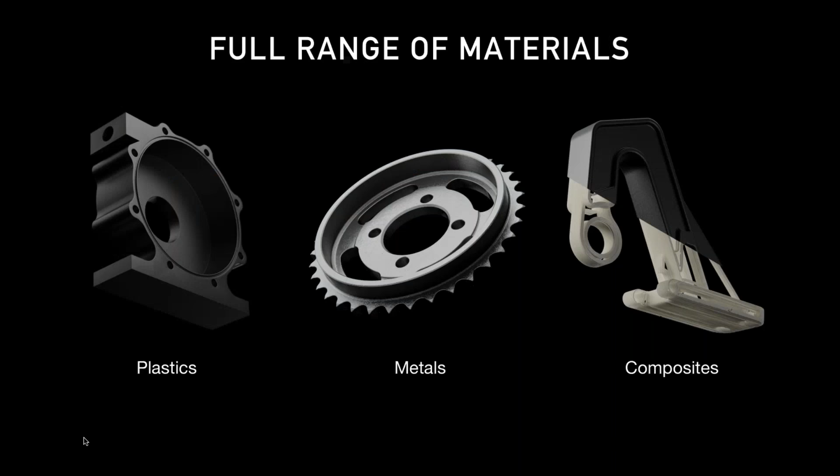That growth has been driven because we're the only company to offer the full range of materials, from plastics to metals to fiber reinforced composites. But today we're going to focus on metals.

Let's start with a customer case study. Dixon Valve and Coupling is a global manufacturer of hose fittings and accessories. They've been in business for over 100 years, and they offer the broadest range of coupling products in the market.

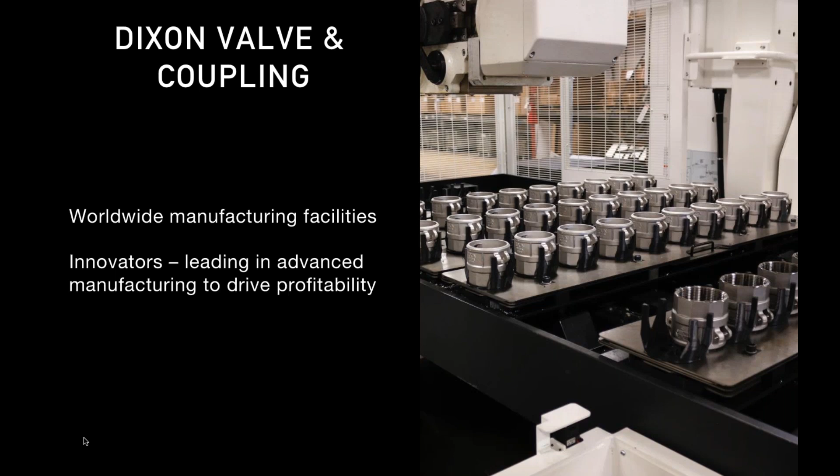You don't survive 100 years as a manufacturing company without being innovative. Dixon Valve has led the charge on moving to automated manufacturing in their industry, and that's been able to drive a great deal of profitability and flexibility for the product lines that they make.

Today we're going to look at one individual particular problem that they're facing, which is an automated manufacturing cell that makes a steam pipe coupling. You're looking here at pictures of the steam pipe coupling on a tray. These things are cast and then machined and galvanized.

And the last step of the final assembly process is to put in a polymer crush ring, and they press that into the part before they ship it to customers.

Unfortunately, when they machine these things, the insides of the couplings are incredibly sharp. You can see that the threads are present inside, and those are very sharp threads.

The way that they press in that crush ring, they use an automated cell. They have a robot arm with a gripper on it, which inserts into the inner diameter of the coupling, expands, picks it up, and moves it to the press fitting station. They press fit that polymer ring in, and then it puts it into the output flow, which you're looking at here.

That sharp thread on the inside is really abrasive to the gripper on the end of that robot arm, so they're wearing through these jaws very quickly. They need to make them out of a hard material. If they need to make them out of a hard material, now they're machining things like stainless steel, which is slow, difficult, and expensive. And if these jaws wear or break, now you've got line stoppages.

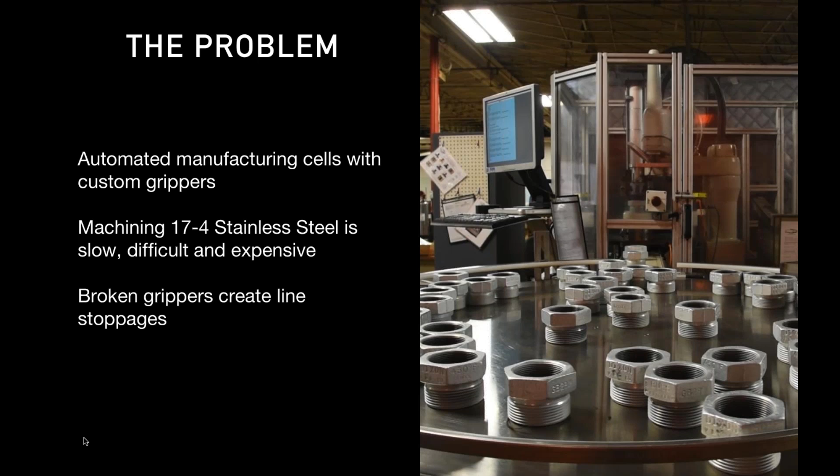Dixon has a lot of flexibility in the types of parts that they make, so often they're changing out this tool as well as changing the shape or type of the couplings that they're manufacturing in this automated cell. So that's the problem that they face.

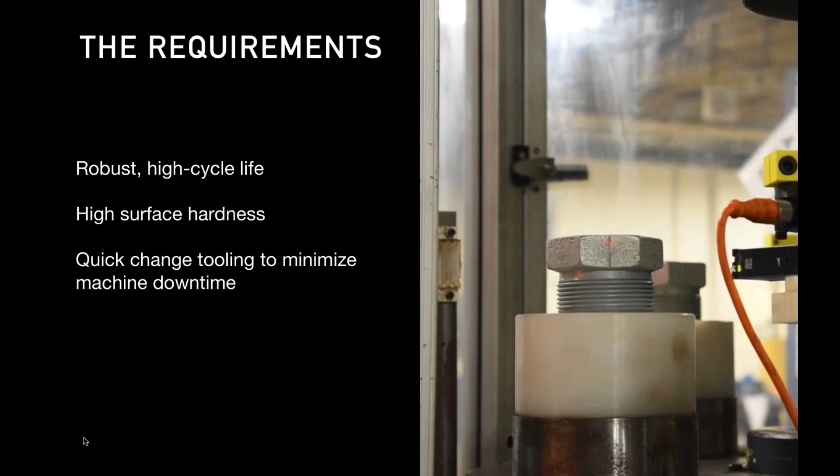Their solution requirements: they need a gripper jaw for the end of that robot arm that's robust, that has an incredibly high life cycle, high surface hardness, so that those sharp threads inside of the part don't eat it away. And then they need the ability to quickly change the nature of that tooling to minimize the downtime of this cell in their manufacturing line.

Okay, let's look at the solution. The solution is 3D printed 17-4 gripper jaws. With the 3D printing metal technology from Markforged, they're able to go from art to the part itself the next day. They save $303 per gripper jaw.

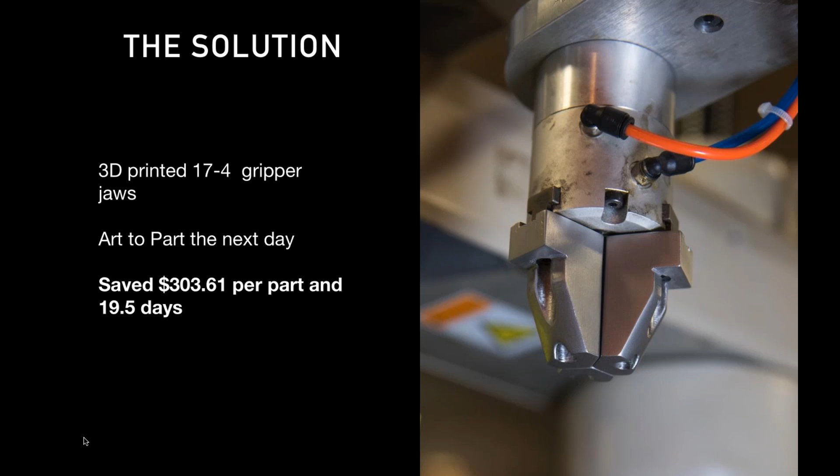That's because their machine shop is incredibly busy. They have one in-house, but they're primarily using it to machine high-value customer parts. So when they need tooling for the manufacturing line machined, they get in line and they have to wait. So now they're able to quickly and easily design gripper jaws for this manufacturing cell much faster and incredibly less expensive.

All right, so to understand how that all works, let's go through the process one step at a time and explain how it goes. We'll start with an overview.

You start with designing your part. You design the part that you want just the way you normally would in your CAD software. You print it on the Markforged Metal X printer. You bake it in an oven. There's a washing step between the printing and the sintering that we'll talk about, and then you're left with your final part. So it's really a series of steps that go from design to part, and you can do that by the next day.

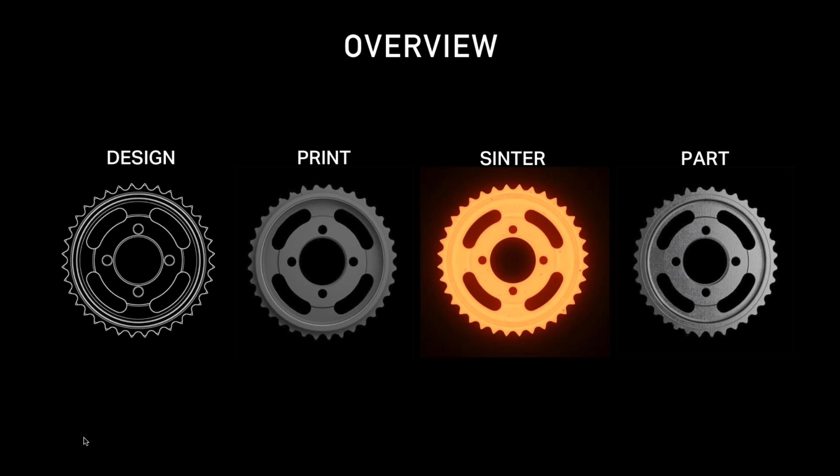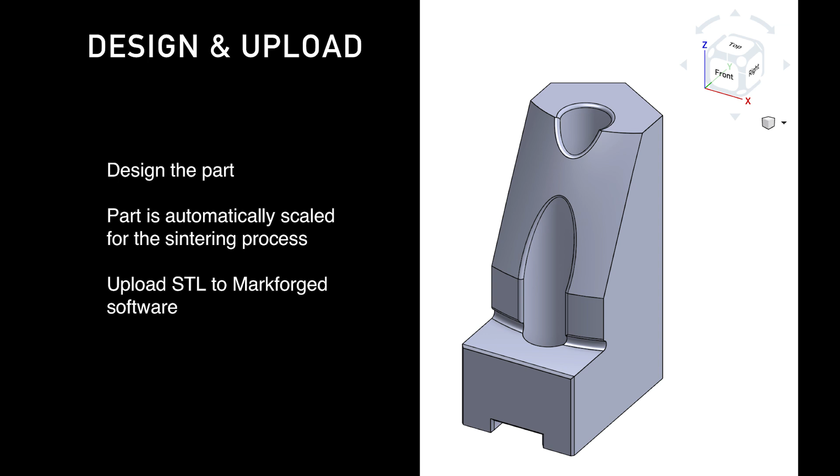So let's go step by step. Step 1 is designing your part and uploading it into the Markforged software. You use the CAD software that you're familiar with today to create the part that you want. You don't have to worry about scaling because we handle that for you to account for shrinkage during the sinter process in our software. And then you simply upload an STL of that part to the Markforged Eiger software.

And after you've designed and uploaded the part, it's really as simple as just hitting print. The part takes about 3 hours to print. I'm going to show you a series of progressive images of that part being created. We would have liked to show it as a video, but it doesn't come across on the webinar very well.

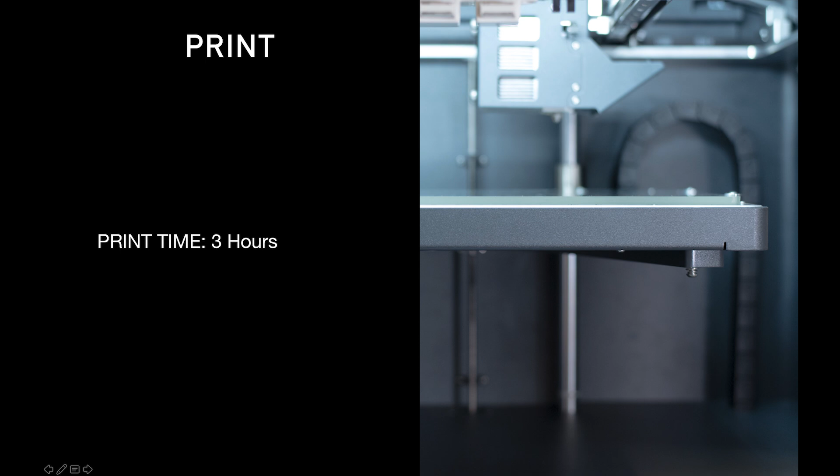Once you've hit print, the printer starts to print that part one layer at a time. What it's printing is metal powder, in this case 17-4 stainless steel, that's been bound in plastic. Unlike other traditional metal 3D printing technologies, that powder is now rendered safe because it's inside of a plastic binding system. We heat that plastic binder and print layer at a time.

So here we will go through and watch that part be built one layer at a time, just like an FDM style part creation process that you're probably very familiar with. And 3 hours later, you have your part.

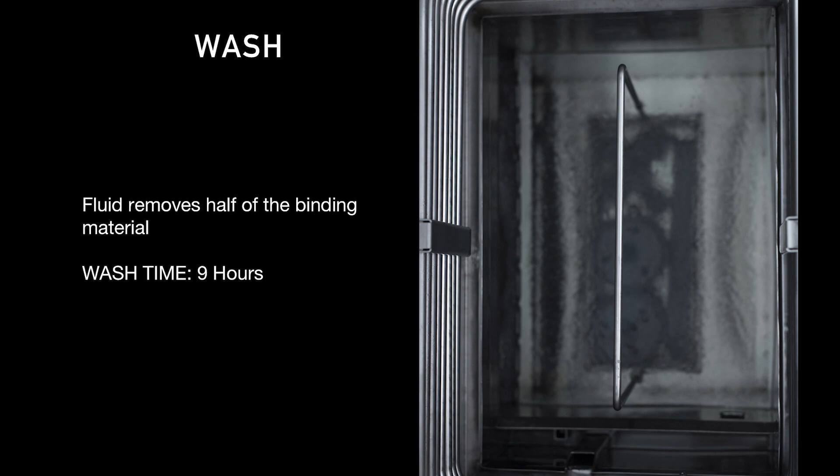The next step is to take that part and put it in the washing station. The washing fluid removes about half of the binding material. It takes about 9 hours to wash entirely through that part, cleaning out all of the half of the binder material so that you're left with a part that's sort of sponge-like, porous almost. At this point, the part is a little bit more fragile, but it's not like so sensitive that you could break it without trying. But it takes about 9 hours of wash time.

It's important to note that you cannot overwash the part, so if you leave it in there longer, that's fine. The only problem is underwashing, so you want to make sure that the part is at least in the washing fluid the recommended amount of time.

By the way, the washing station is connected to our software, as is the sintering station, which we'll talk about next. So we'll tell you exactly how long to wash it. We'll track that washing, and you'll get an email when it's done washing. So this is really almost as simple as running your dishwasher. You place the part in the basket, drop it into the station, close the lid, and come back and get the part back out when the timer expires.

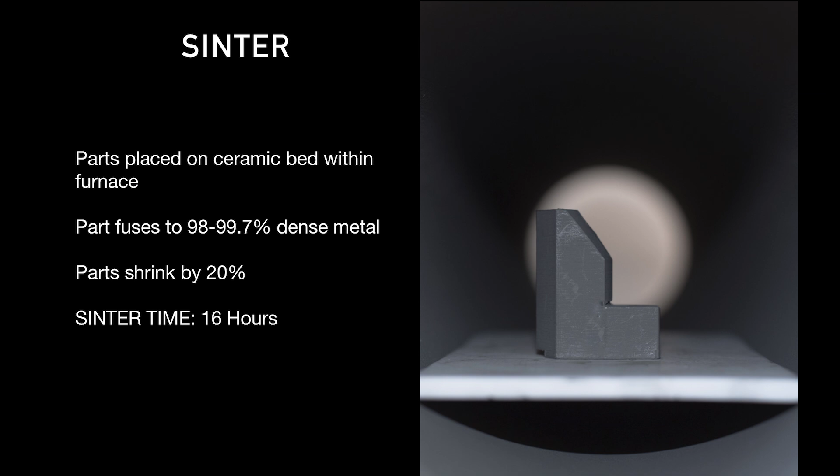Once the part has been washed and that first layer of binder has been removed, you move on to the sintering step. You place the part on a ceramic bed inside of the furnace. We have two options of tube furnace available.

You slide that into the hot zone, the uniform hot zone inside of the furnace, and you sinter the part for about 16 hours. During the sintering process, the part is run through a series of ramp and hold temperatures. The first hold temperature burns out the remaining binder material, leaving you with powder that is held loosely together. As you continue up the temperature ramp, those small metal powders start to neck into each other and then eventually sinter together, pulling into a part that shrinks by about 20%.

And you're left with a final part that's fused up to 99.7% dense metal. The sintering time is about 16 hours, and that includes the time from placing the part and hitting start until the part is cooled down and is ready to remove from the furnace.

You can fit multiple parts inside of the furnace, so depending on which furnace you pick, the Sinter 1 or the Sinter 2, we have larger or smaller sintering areas. So you can put as many parts as you can fit inside of that area for each sintering run.

And again, the furnace is connected to our software, so we will monitor the sintering run for you while it's happening. You'll be able to log into the software to see where you're at in the process and how things are going. And when it's complete, you'll get an email that it's now time to go get your part.

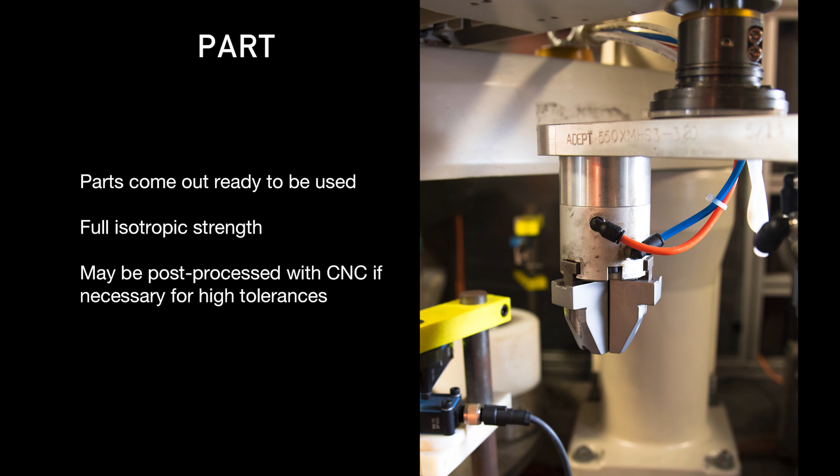And then here it is in use, locating that fixture on the rubber ring, the polymer ring you can see there at the bottom, that will then press fit that together for final shipping.

Okay, so they were successfully able to print their gripper jaws. Let's look at their return on investment. When they were machining that part in-house, the cost was around $315. The all-up cost on the Metal X is $11.45 a part. That's about $6 of material cost, and the rest is allocated across washing fluid and the gas that is used to run the furnace to create the atmosphere inside the furnace during sintering. The savings per part then is like $303, which is 96.4% against their traditional manufacturing mechanism.

And then, of course, time. Time is really critical in a manufacturing environment. They're now able to get their part by mid the next day instead of waiting around on the machine shop. That cuts down weeks of time from their process and gets them to about a 92 or 93% savings in time. So that's why this makes a lot of sense for them. They're able to accelerate their ability to react to changes, to change parts going through the automated line, and to replace broken parts incredibly quickly, and save a lot of money, about $1,000 an instance while doing it.

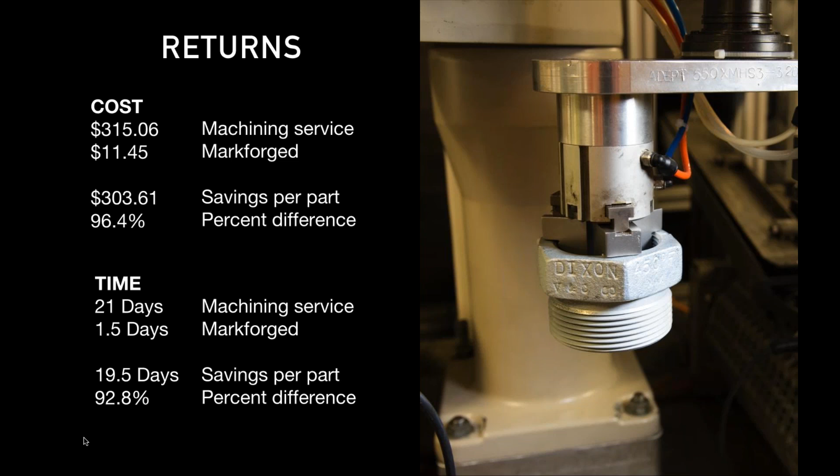So those are the crucial benefits. They get parts the next day. Their workflow is simplified. If any of you have worked with a machine shop in the past, often you need to cut drawings, dimension those drawings, then hand them off to be machined. Sometimes you need to create work holding fixtures. There's a lot of work that goes into having a part machined. Complexity is free with 3D printing, so it's a much easier problem. You go straight from the design to printing the exact part that you're going to need. That lets you get products to market much faster, and it increases your profitability of your manufacturing line.

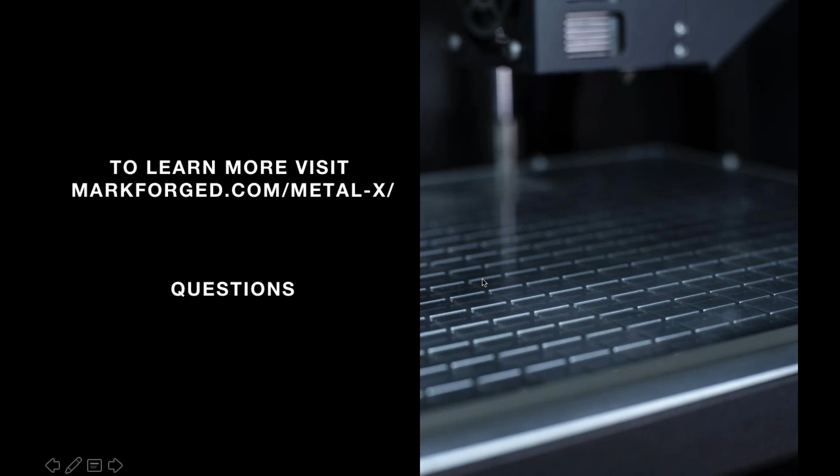In about a week, you'll be able to see the Metal X software working in Eiger. You can go online and create an account—there's a software demo tab on the right-hand side of the screen at markforged.com. You just put in some information because we make that account unique to you. Then you upload your part, and it'll tell you material times, sinter times, weight estimates, costs, etc. You'll get all the information you need about your part. You'll be able to select stainless steel, and you can also play around with the other materials we have, the composite materials and reinforcement. I encourage everyone interested to check out the software solution at markforged.com.

We have some questions about the washing fluid. It's called Opteon SF79, from Chemours. If you're interested in learning more, you can find information online or request it from us—we have safety data sheets and other information. The washing station takes about 8 gallons of fluid to fill, and you only need to replace a few gallons of it about once every couple of months.

There are some other questions on the washing station—is it an ultrasonic bath? No. The washing station has a clean and a dirty tank. The parts sit in the clean tank, which is constantly draining into the dirty tank. The dirty tank is heated to the boiling temperature of the fluid, which evaporates above the clean tank and condenses back into it. So the washing station runs a continuous cleaning cycle on the fluid, accumulating removed binder in the dirty tank. When you're ready to change out the washing fluid, you go to the back of the wash station, open a valve that drains fluid from the dirty tank, and pour more fluid in through the open top into the clean tank. Even under heavy usage, you maybe go through a gallon of fluid every month or two. In-house, running the machine 24/7, it took us 4 months to use our first gallon, so that's probably a conservative estimate. You don't lose much of it because it's carefully condensed to stay within the machine.